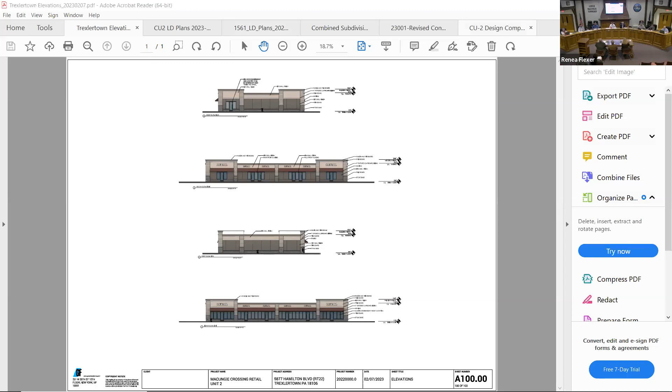All right, as I share the screen here, we've had several meetings with these folks. All have been very fruitful. As you recall, the last time the plan was before us, we had discussion points with respect to technical items that I will leave to our township engineer to discuss in greater detail from a planning perspective. We have worked at great lengths with the applicant to ensure that the proposal meets our design guidelines for the township as well as our plan concepts for the Hamilton Boulevard corridor.

What you can see on the screen right now is the renewed facade and building treatment for this proposed retail and service center. At the very bottom here would be the front. Changes that have occurred include inclusion of parapets instead of pitched roofs. We have awnings on the front. This would be the actual front entrances and vertical elements. Then it moves to the sides where we have similar treatments throughout the structure.

And then ensuring, because the rear of the structure is going to face Hamilton Boulevard, we really wanted to work with the applicant to make sure that we got that double frontage so that we continue to have that storefront look on Hamilton Boulevard, which this rendering shows perfectly. So you'll see the emergency access doors and faux windows basically acting as storefronts with that signage, with those awnings the same way. That, with the inclusion of the patio for the potential food user, which here on the side, you can see a potential door entrance for patrons to go out for outdoor dining, if that's what that ends up being.

Basically creates what we've been trying to achieve for all of our centers along these line items that are coming in on Hamilton Boulevard, which creates that lively streetscape. Hopefully we'll see people eating out there like we do at Notch, and at Shepherd's Corner.

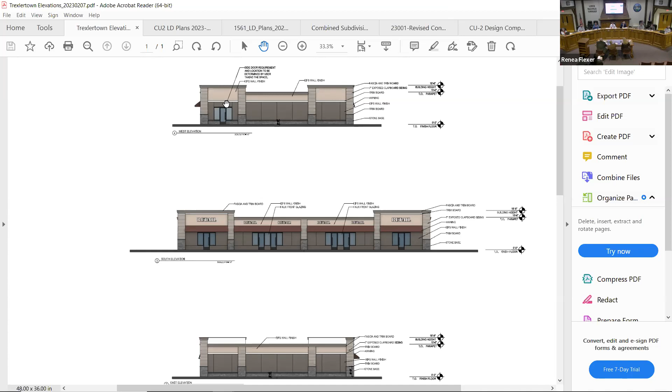We've had discussions with your engineer's office. We went back and forth, looked at the notice of intent, plan notes and details, and ensured that all the notes and details are now updated to meet the current ordinance standards. So we are satisfied with the red line changes you guys are going to make, and expect that the next plan revision will be up to date for those current standards.

Thank you, Attorney Durso. Just so we have everybody's name for the record, if you could introduce your team. Sure—Kate Durso from Fitzpatrick, Lentz and Bubba; Bud Newton, who you all know; and John Karakis from Greenberg Farrow. Thank you.

Any particular issues you'd like to bring to the Planning Commission's attention?

I'd like to thank Brian—if you remember, at the last meeting there was some confusion on how we report what was done with the Home Depot part of the project versus these new components. We worked closely with Brian and got that resolved right after the last Planning Commission meeting. There is one item in the traffic engineer's letter regarding

some future ADA ramps on the out parcel and crossings of the main driveway on lot one. We did not ask for waivers on those because we're not dealing with those out parcels in lot one at this point—they'll be addressed when we submit plans for those lots. Other than that, the only waiver we're asking for is that this be considered a preliminary final plan.

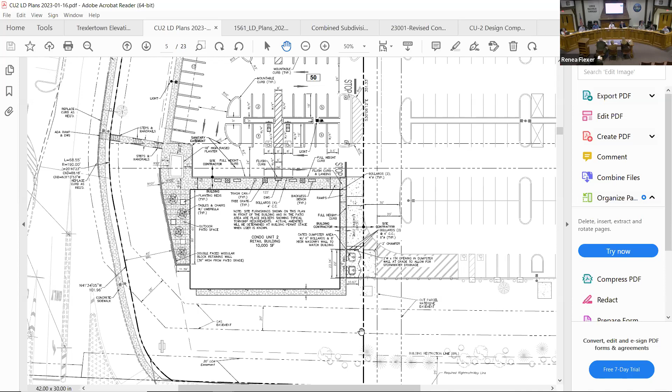And we're hopeful that you appreciate the renderings and the new elevations. We knew that was an issue last time.

Are we ready for Mr. Hammer? Is it hammer time? All right. Still need public—yeah, we'll get public comment. We'll open up for public comment at this time.

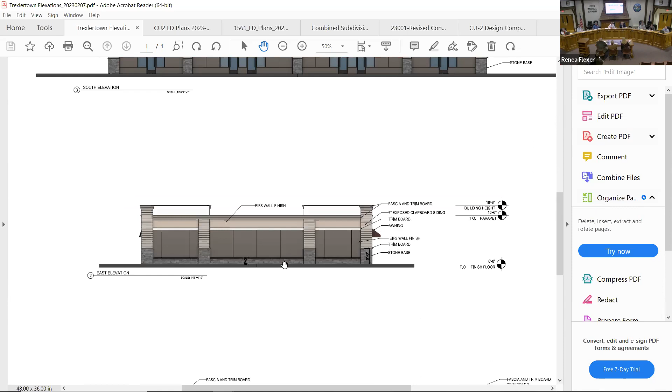All right, we'll entertain a motion, and just so we all understand, it'll be the sample motion as well as an additional waiver—approval of a recommendation for approval of a waiver so the plan can be considered a preliminary final plan. We have to add that one thing to the draft motion. My apologies on that oversight.

All right, I will make a motion: motion to recommend approval of the Home Depot Condo Unit 2 plan upon the following conditions. First, the applicant shall address all comments in the most recent Township Planning Department, zoning officer, and Township Engineer review letters to the written satisfaction of each. Second, the applicant shall construct the proposed building in conformity with the elevation shown to the Planning Commission at their February 14, 2023 regular meeting.

Number three, the applicant shall construct the proposed building with the exterior patio and fencing as shown to the Planning Commission at the February 14, 2023 regular meeting. Fourth, the proposed retaining wall shall have a facade reviewed and approved to the written satisfaction of the Township Planning Department. Fifth, the applicant shall install a monument sign at the paved entrance of the lot as depicted on the plan, with a design meeting the written satisfaction of the Township Planning Department. And six, that the waiver be approved, allowing this to be a preliminary final plan. Mr. Chairman, that is the motion.

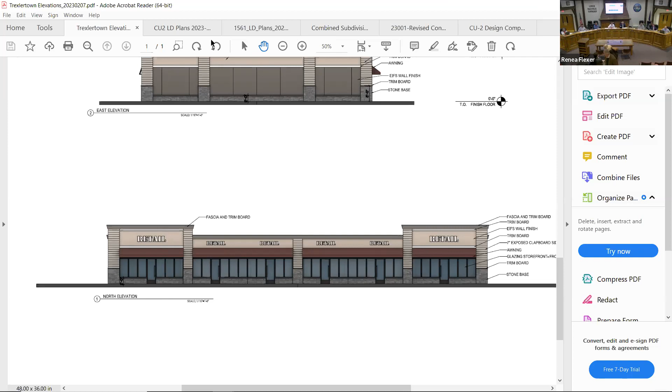All right, up next is the Valley at Indian Creek, 3510 Macungie Road preliminary final subdivision plan.

Nate, if you can take us through the planning issues.

Sure thing. So what you're looking at here is the plan that should not be all that unfamiliar to the group. As everybody recalls, we had several iterations and long discussions with respect to this proposed subdivision off of Macungie Road at the intersection of Macungie and Indian Creek. The applicants did receive zoning relief to put in single-family residential dwellings on a loop road coming off of Macungie Road.

There's going to be 22 dwellings. The road system, as you can see here, is a little tight, but we've looked at it from the design perspective. We'll continue to make sure that it handles our larger vehicles, both for the municipal side as well as for garbage pickup.

One thing I should note is there's a fair amount of open space proposed as part of this project. Here we have open space at the northerly end of the site. It looks eastern, but that's actually the northern delineation, and at the southerly portion of the site. There are a couple of easements for stormwater in between the lots, as you can see here, and there's a walking trail proposed that will tie into the abutting park.

From my perspective, we have a couple of items we want to keep on everybody's radar, not too far out of the zone of prior discussions with the applicants. We continue to recommend street trees, given the size of the street, the sidewalks, and the front yards. The strip in between would be better with street trees on the lawn side as opposed to between the sidewalk and curb. Given how close everything is in this development, we want those trees to have a chance to thrive and get as large as they can without causing infrastructure issues. So in this particular circumstance, the backside of the sidewalk would actually be best.

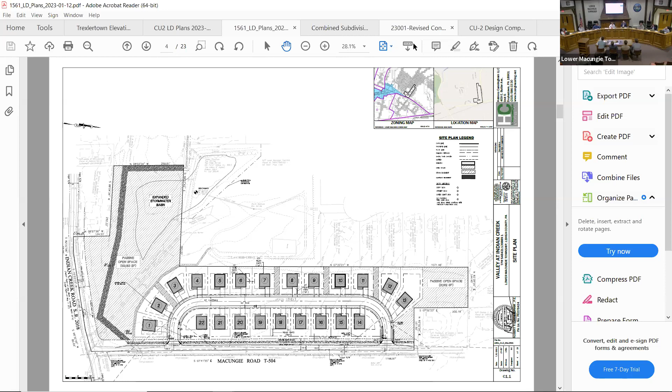The next one was waiver D on page 3, related to replacement trees. We are currently providing as many replacement trees as we are able. There's one area mentioned in the CKS letter where we might need to take a closer look, to the eastern or western end of the basin where the sewer and walking trail connect. However, for what we have on site, we've tabulated all the 6-inch or larger trees, and looking at replacement trees for those, we are required to plant 50 replacement trees. We currently have 12 replacement trees, which means we're 38 trees short of the requirement.

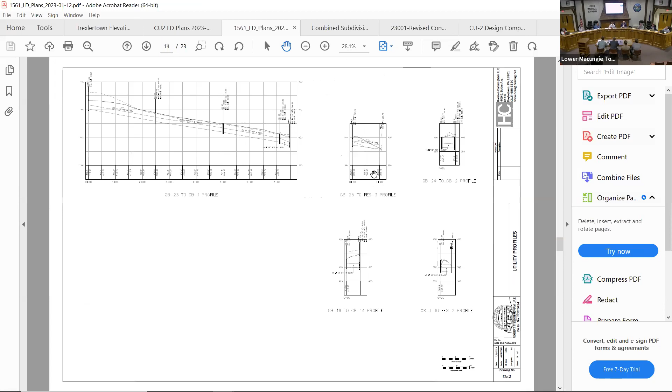So we requested a waiver for this because we don't really have anywhere on the site to plant them that is a common space not within a sight triangle, easement, or basin. The landscaping plan should be toward the back, we're looking forward on.

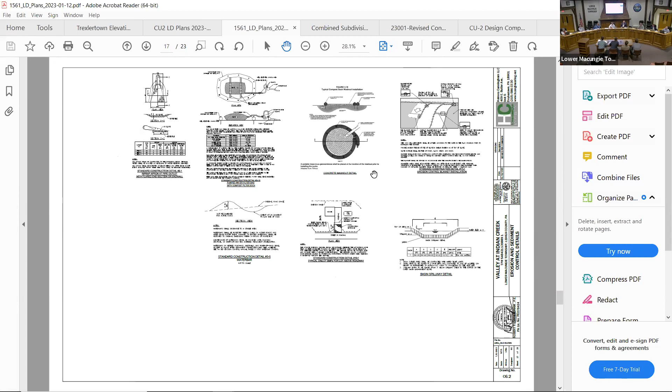Yeah, I'm pulling it up, it takes a while to load. It's the last one. There we go, so this is our landscaping plan.

We have the sight triangles near the roads and intersections. We've planted along the sewer easement, between the sewer easement and Indian Creek Road. And there's the gas easement that runs through the middle of the site between the basin and units 1 through 3. So we don't really have anywhere appropriate to put these trees in a common space on our property. The reason we wanted to bring that up is the CKS letter mentioned it might require a variance, so we're looking to comply with the zoning ordinance to the maximum extent possible. I'm not sure from a legal perspective whether a fee in lieu of those trees would relieve that concern.

Or if not, we could potentially plant them on the lots themselves to the maximum extent possible to satisfy the replacement tree requirement. Another option would be substituting large specimen trees with smaller shrubs that get to a medium size, potentially on common space or along the basin, something like an elderberry or certain willow varieties.

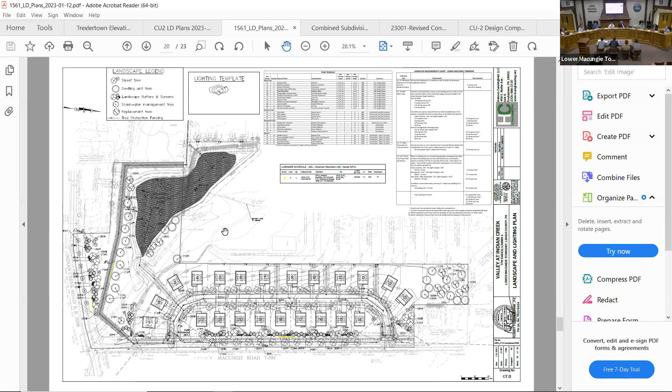The next item was related more broadly to streetlights. So we've currently proposed one streetlight at each of the intersections of the Loop Road and Macungie Road. The letter is seeking, I presume, further streetlights and a streetlight district for the development. We just wanted to get some clarity on what that would involve.

Yeah, what the township will be looking for. So the streetlight district is just a fancy term for making sure we get on PPL's radar, because the lights and the setup of how they get billed to the HOA all have to go through PPL. That's the creation of the streetlight district—just an application that gets filed, for everybody's edification here in the audience and those watching from home.

We have some older neighborhoods that never had streetlights installed, and the residents come together and ask, and they create a streetlight district. What we're doing now with every new subdivision is saving that process into the future, and we just create that district to begin with for every new subdivision.

Well, I commend, and we're happy having them at the intersection. It was brought up in some staff meetings that maybe 2 or 3 more throughout that road would be advisable, just to provide lighting. I guess the only other question I would have is, are there individual light posts proposed for each one of these homes? Sometimes people do that, but if not, I would say go with the street light.

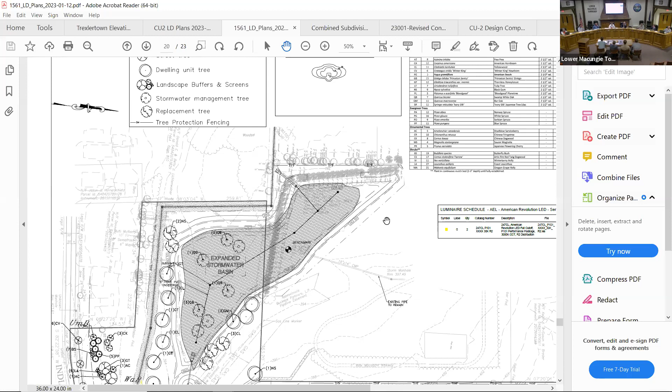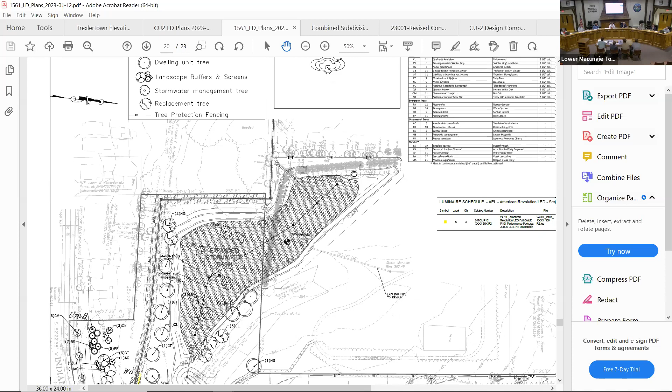Now, granted, we would need to go through the process ourselves, but it would be cleaner to have that as a separate lot than as an access easement for the basin on an entirely large township parcel for the park. My concern is I'm not sure this development only having 22 homes makes for a viable homeowners association. Wouldn't it be better if you donated the open space on the south side of the project adjoining the parkland, and dedicated that to the township? The township would assume responsibility for that property and the entire basin, and then you'd pay a perpetual maintenance fee so the township could use those funds to reimburse itself for the costs of ongoing maintenance. Wouldn't that make more sense than relying on a very small homeowners association of 22 lots to take care of this into the future?

Makes a lot of sense. Mr. Bile, are we dedicating the road then too?

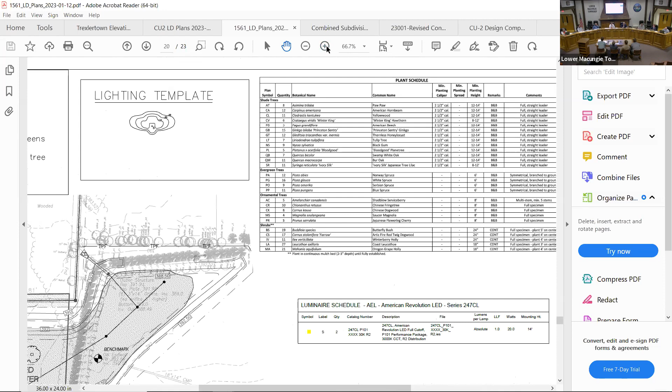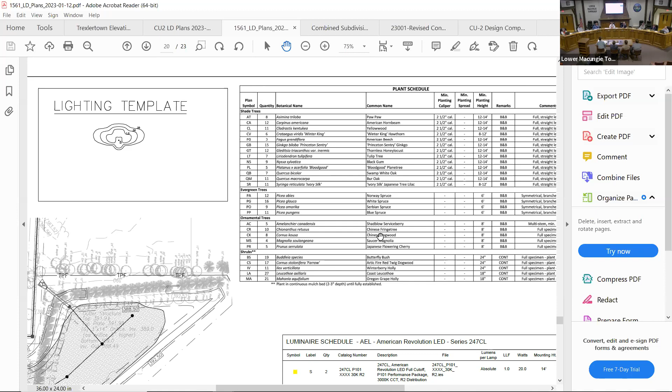This is an issue you ultimately need to take to the Board of Commissioners, because it's outside what the Planning Commission can provide direction on. My personal opinion is we should take the road, for the exact same reasons. I don't believe a homeowners association is going to be viable long term with only 22 homes. I think we're asking for trouble. So in my opinion, the township should take care of the road, the township should take care of the basin, but you guys should pay a perpetual maintenance fee to make sure the township has funds to reimburse us for the costs of ongoing maintenance.

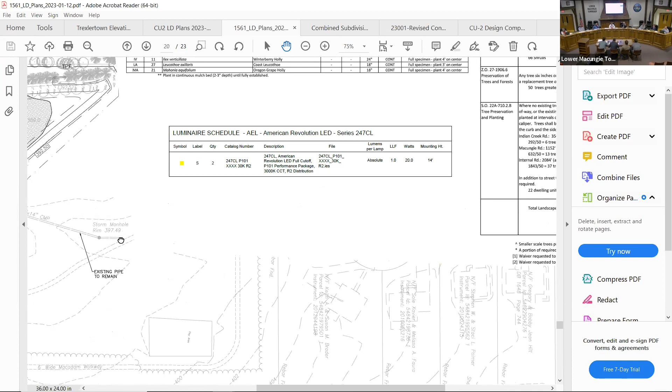All right, we'll take that. I guess my other question is, the stormwater that enters the current basin at the township park, where is that coming from? There are three areas we're looking at. One comes from the homes to the west of the property, which generally drains down through the park to the existing basin. The other area is our site itself, some of which comes to the existing basin today, and some may sheet flow elsewhere, though I believe most of it goes to the basin. And then there's also a cross pipe on Macungie Road that comes from the eastern side across to our side, which has a huge drainage area of farm field, and some of that gets into the basin as well.

And I guess where I'm going with that question is, if the homeowners association ultimately winds up responsible for maintaining the basin, and they don't do a good job, they fail in their responsibilities to maintain it, where is the stormwater problem going to materialize? It would materialize on the parcel to the west, which I believe is also owned by the township. There's a large low-lying area that would take the impact. I don't believe any homes would be directly affected, but of course it's a situation you'd want to avoid.

I'll pull up the map so we can all see the overall area here.

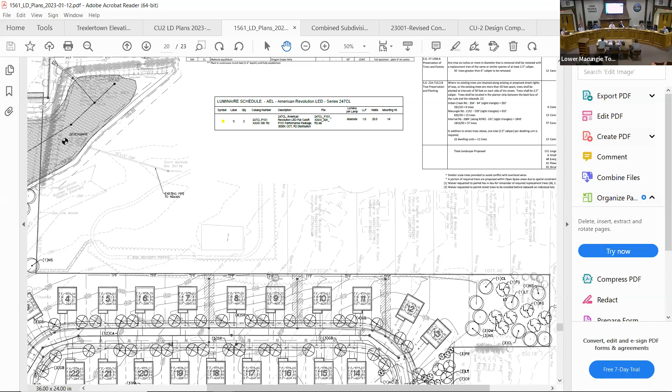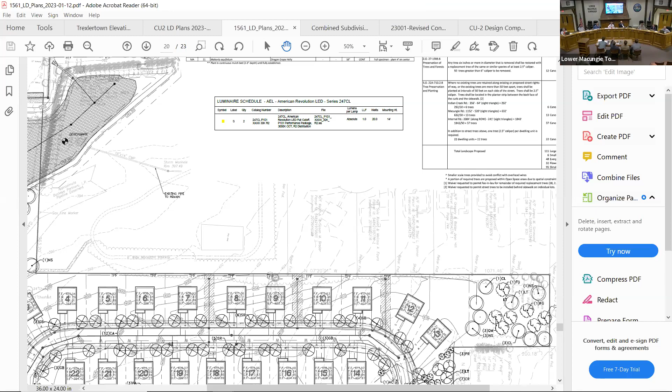So the stormwater problem doesn't materialize in your development, it materializes in somebody else's. Right where the mouse is, just to the right of that, Nate, there's a... right there, just to the north of Jasper Road, that grass area is very low lying, and that's where there would be ponding if the stormwater basin were to fail. Looks like it's pretty close also to Jasper. There's that low-lying land right in here, street view. All of this, correct, with the big willow tree. That's an indication.

May want to throw this out there: the applicant's not changing the location of the emergency spillway from the existing basin. They're utilizing that same location. So where the existing basin would fail, they're just expanding that basin and using the same existing emergency spillway location. They've expanded and cleaned up the spillway, but it's the same location as the existing township one.

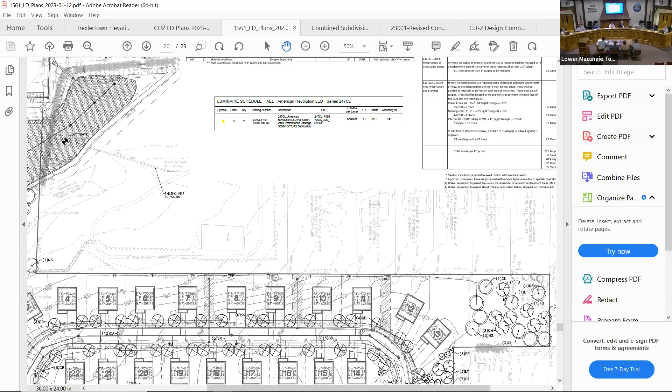That's right. And we're happy to either dedicate the basin to the township, if you believe the township would do a better job on maintenance as opposed to an HOA, or we can go the HOA route. We're happy to do whichever is best for everyone.

The street trees - I know there's a discussion about the street trees going between the curb and the house. Would the street trees be out of the right of way, or would they still be in the right of way of the road?

Currently on the loop road, the new road we're creating, we have the street trees behind the sidewalk already. So it would be the curb, then a grass strip, then the sidewalk, and then the street trees. And those would still be within the right of way.

The ones along Macungie Road, we currently show in that grass strip, and we would move those out to comply with the comments.

And the trail is, I believe, proposed over the sewer line easement, subject to approval by the sewer department. And there's also a trail that connects behind lots 1 through 3 that goes to the park.

Do we know if the sewer department is okay with the trail on their easement? We have had a few preliminary discussions with them. They haven't mentioned it as a problem, but they do have to do a full plan review, which is forthcoming.

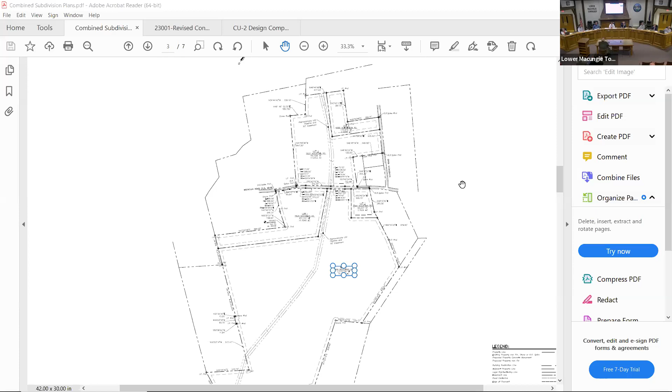All right, but I think it's great what your client's doing in terms of preserving over 90 acres of land. I mean, that's awesome.

He's very much into environmental causes, and as I mentioned to Nate when we were talking last week, he's been impressed with Wildlands Conservancy. So what he's thinking about doing here, and we met with Nate and Bruce about this, is he's going to enter into an agreement with the township to outline what he wants to do in lieu of these waivers. But he's very insistent about getting these waivers and not having any fees to pay for it.

But there's very minimal fees we'd have to pay anyway, because the southern part of the project's outside the transportation service area, so there wouldn't be a traffic impact fee for that. On the north side, there's only one house being proposed, so that'd be the first exemption you'd get anyway, so there shouldn't be a traffic impact fee. The only fee I think you would get would be a rec fee for the second lot on the south side, so he's asking for a waiver of that, but the open space dedication should more than offset that.

The shape of the lot on the north side, the L shape, is primarily because your ordinance does not allow for a flag lot. His son doesn't want to have his house out on the piece that fronts across the street from the Mobile Home Park. He wants to be in the back, but I couldn't just put a 50-foot stub in for the house to be in the back, so I had to put a 150-foot minimum lot width along Gaiman Road. We could actually reduce that if the township would agree to it, but we don't want to have to go through zoning to change that. So that's why that's 150 feet.

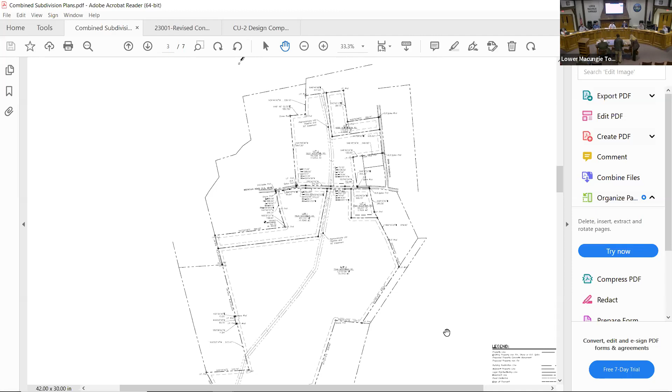All right, next item on the agenda is Prachi Realty, conditional use application for the property at 801 North Broad Street. Nate, you want to review the application with us? Yep, just getting the screen share ready for you all here.

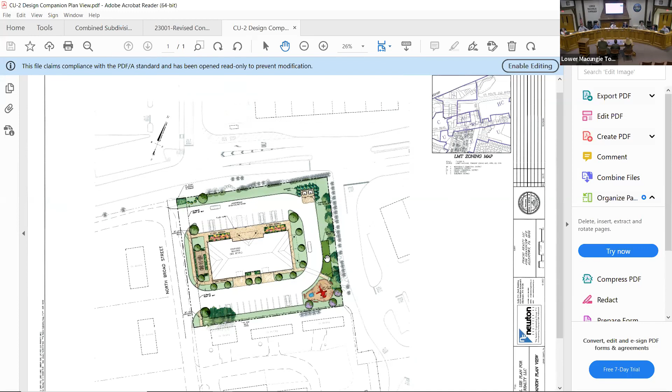So we've had several meetings with the applicant and their team with respect to the development of this site. It is immediately abutting Hamilton Crossings, and frontage would rest on North Broad Street, essentially at the corner of North Broad Street and New Street, which is really a very limited access street. I would go so far as to almost say it's about the size of an alley, but it is a street for frontage purposes for a couple of homes. To the south of this site is the mobile home community. To the immediate east is Hamilton Crossings, and to the north is Hamilton Crossings.

The applicants have included a patio area out here on the front along North Broad. There is a tot lot proposed. There is a dog park / dog run area proposed. There is a refuse area with landscaping and a masonry wall proposed. Some quite nice landscaping, and at the end of the day, I want to pull up the concept plan.

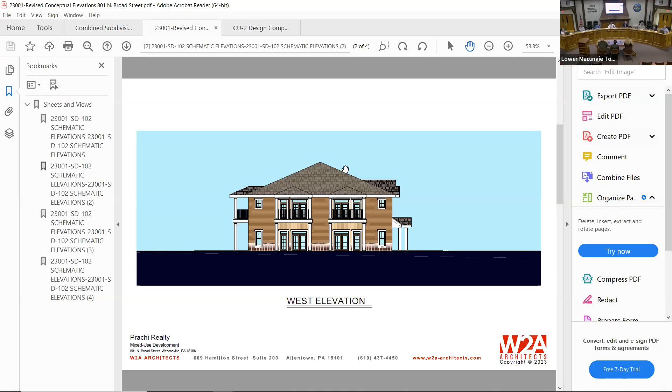There was an original concept plan. We now have a new concept plan for the site that meets our design guidelines for the township. We feel that the structure is actually looking quite nice at this juncture and is what we call a transitional structure, moving in between the residential single-family homes and the higher density commercial use of Hamilton Crossings. So the structure is looking good. The site plan as it's laid out shows all those site amenities.

A couple of planning comments. There is a solid fence that's proposed on the south side here. We would recommend keeping the existing trees and maybe throwing in arborvitae for the benefit of privacy for those folks. So that is a recommendation that we would have.

Additionally, we have had this discussion on a couple of occasions with the applicant and with the applicant's representation, Attorney Durso. We recognize that there is going to be a challenge with pedestrian access to Hamilton Crossing. They're just not allowing it. It is something that we've even considered in the sketch plan recommendation of requiring. If it is completely impossible, my recommendation to the Planning Commission is that the applicant install basically some deterrent fencing to make it hard to get down that hill to go over to the Chipotle or the Whole Foods, et cetera, along this area here on the north side, where you would essentially walk right out.

Either come right down here or in any of these areas, get a fence up. It doesn't need to be solid, but definitely make it not pleasant to try and get across. It's a health, safety, and welfare issue. So that could potentially be a solution if there's absolutely positively no way for connectivity there.

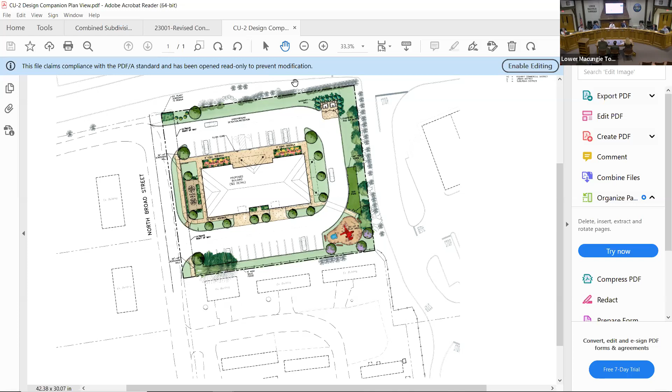So I would like to note that we appreciate, on the planning side, the site is looking quite nice. The structure looks nice. The landscaping is quite nice. Very satisfied from a planning perspective. The pedestrian connectivity, we've got to figure out a solution for that, just for safety purposes. Brian, if you could go into some of the more details with stormwater and site access. I think those are things that we do want to talk about on the design end to make sure that this is a successful development, given some of the constraints with its access to Hamilton Boulevard.

All right, thank you, Nate. So we did the sketch plan review for this site.

We noticed that you have taken some of the items into consideration with providing sidewalk all the way around the building, the expanded dog park, and the full widening along North Broad Street.

We do have substantial concerns relative to site access. Honestly, I think it's interesting in your notice of intent, general note 1 on your plans, talk about how mixed use is a good use in this area, specifically because of the direct access to adjacent shopping center and the valuable commercial use. We agree that mixed use is actually one of the primary items in mixed uses is accessibility, walkability of the additional uses, pedestrian access, and we struggle because the site is not providing that. Access to Hamilton Crossings would really fulfill that requirement for that idea of mixed use.

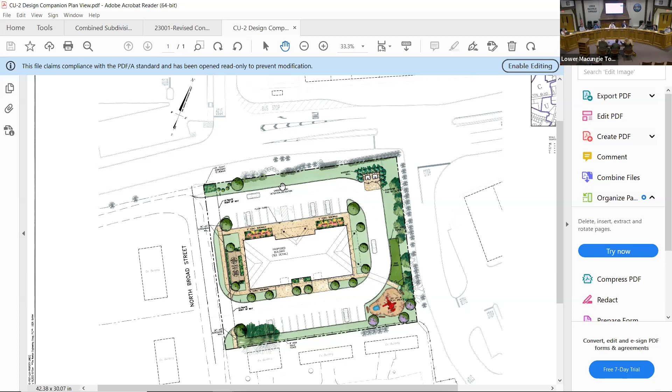Attorney Durso, if you just want to introduce your team. Sure. Kate Durso, Fitzpatrick Lentz & Bubba, Jay Patel, Jayendra Patel—he is one of the property owners. And then obviously we have Bud Newton, and Max Patel is here as well, one of the property owners.

Yeah, I'd like to start with a little bit of history. Some of you folks may remember that when Hamilton Crossings was going through, Robert Bosick owned this property. He originally thought he had a deal with Tim Harrison that would have provided access to this property from Hamilton Crossing, because he was supposed to be involved. You may remember, Bob, some of those discussions. We were in with some sketch plans at that point in time in front of the Planning Commission.

And then when Goldenberg got involved, those plans fell apart. Goldenberg wouldn't honor any of those previous commitments, and they wouldn't allow for vehicle access. They wouldn't allow for pedestrian connections through. Also, there is a swale along the property line on the Hamilton Crossings property that's supposed to take the water from this property, and that goes along the entire property from New Street, with several inlets, and there's an inlet right opposite this.

We are going to contact them again about the possibility of connecting a pipe into that inlet, but previously they've denied those requests on other projects that we've had. If we can't get that permission, we are proposing to put an underground detention basin in the north parking field. That part of the property will be raised up, and we will be discharging that to grade, into that swale area that will go to the inlet. It's the only thing we can do, because that's the arrangement they've made if they don't allow us to connect to their inlet.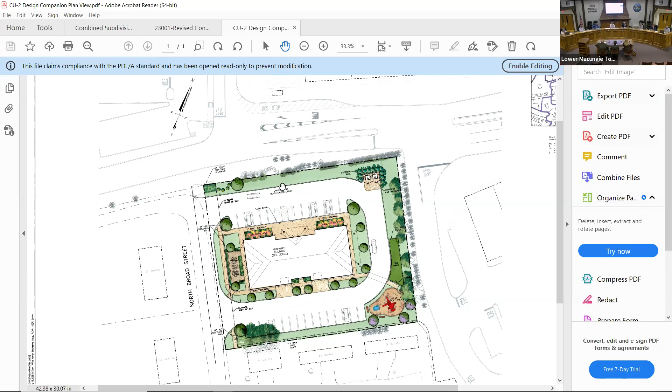Can you describe the configuration of the proposed building? You've got a mix of residential and office. How is the building segmented into residential? It's gonna be a two-story building. On the south part of the first story, there's gonna be two units here on the south side. This side on the first floor, there are gonna be two apartment units in the back, and they're gonna be ADA accessible with garages for the ADA units. Then you'll have a central corridor with staircases up to the second floor where there'll be 5 apartment units. On the opposite side, there's gonna be two medical/dental offices. Jay's a dentist, he's gonna have his office there.

You want to flip to the north view? So you'll have the dentist office on one side, and another professional office on the opposite side. You'll have the professional offices facing the shopping center, and the residential properties facing the mobile home park. The second floor is all residential apartments, and all the apartments have balconies for a little bit of outdoor space. We tried, after meeting with Nate and Carl, to make it blend in more with the neighborhood, so that's why you see the different design to make it look almost more like a townhouse type of look.

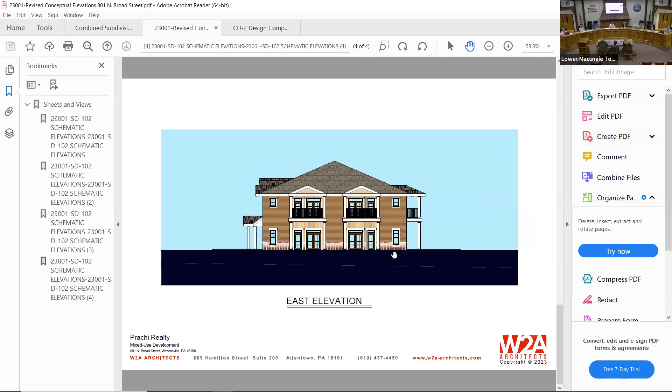Now, the only entrance to the commercial portion is on the north side, right? There'll probably be emergency exit doors on the east and west side too, just for emergency exits, and also probably employee egress to that common area in the back, because there may be some parking for employees in the rear of the building. But primarily, the residential people who are going to live there will be entering on the south side. They can't enter on the north side because that's for the business. The customer parking is all gonna be on the north side, but there's gonna be some employee parking on both sides.

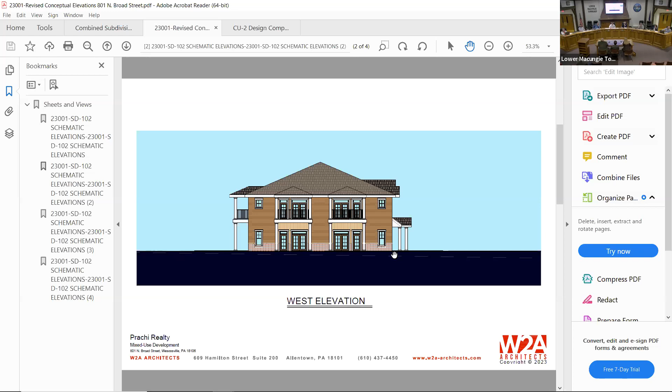One of the things we asked when we had W2A design this was to get something that would fit into the neighborhood, with materials that would match Hamilton Crossings, and also that the building would act as a transitional zone.

Anyone traveling to or from this location will have to use Broad Street - there are really no other options. We understand the township desires to avoid anybody going down New Street. Broad Street is a local road, in fair condition, and it does serve as the major access to the mobile home park.

We did intentionally design the site so the radii would allow fire trucks and garbage trucks to get through. We discussed with staff that right now the fire truck couldn't turn around at the end of Broad Street, so we designed the site to make sure they could turn around there. I'm envisioning we may have to give the township an access easement for snow plows to come on site and turn around, since there's no good way for them to turn around on New Street.

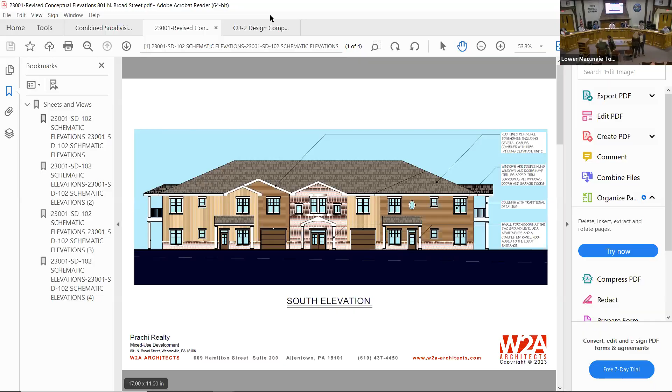Only have one other item, and that's the planning department report. Just wanted to give everybody a heads up that the Board of Commissioners is looking to consider this, and I think it's gonna proceed forward.